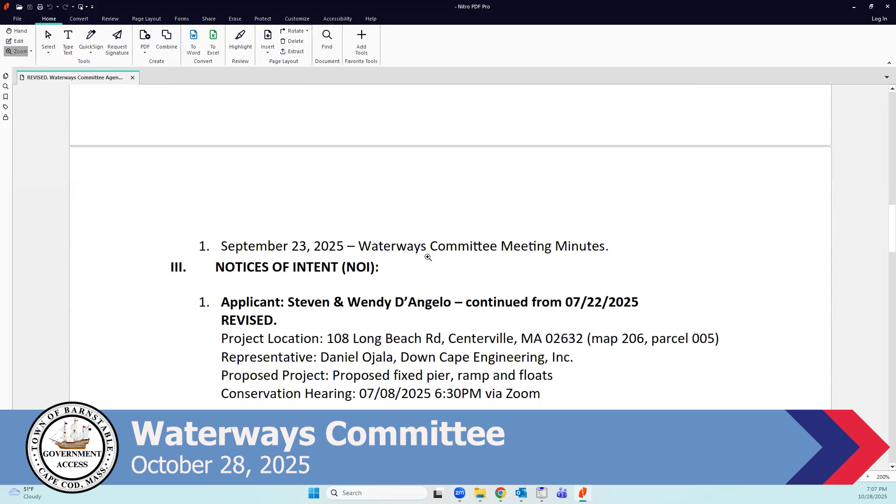Waterways Committee meeting minutes - do we have those minutes for September 23rd? Good evening, Brian Taylor, Harbor Master. Yes, Polly submitted them through email earlier this week. Has everybody had a chance to review those minutes? If so, I'll entertain a motion to approve as written. So moved. Second? Second. All in favor? Aye. Thank you.

Next up we have Notices of Intent. Steven, Wendy D'Angelo - this is continued from 7/22, revised. The project location is 108 Long Beach Road in Centerville, represented by Dan Ojala of Down Cape Engineering. The project is for a proposed fixed pier, ramp, and floats.

The conservation hearing was on 7/8. Do we have Mr. Ojala? Yes. Good evening, Chair Everson, members of the committee. For the record, my name is Dan Ojala. I'm a licensed civil engineer and also a professional land surveyor, and I work with Down Cape Engineering in Yarmouth Port.

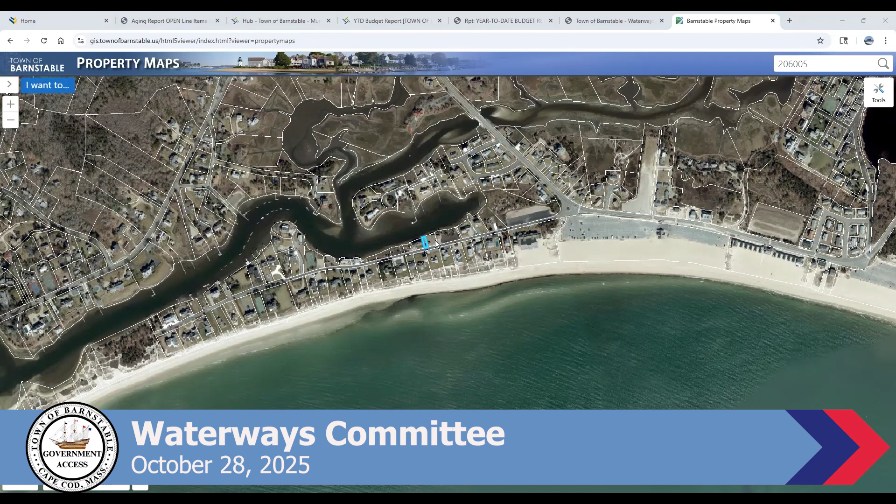As you may recall, this is on the little cove off of Centerville River, so it's kind of a backwater - it's the end of the Centerville River, unless you're going to go north and up under the bridge. Some kayakers may go up that way. It was dredged a while back.

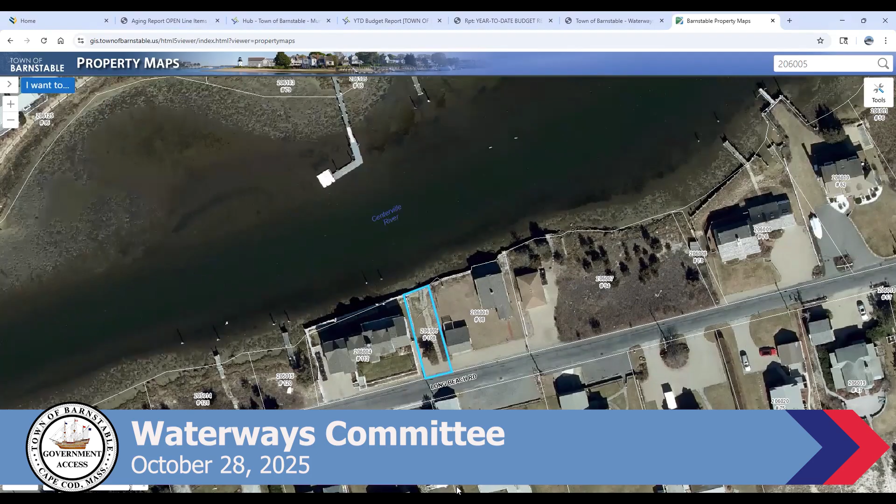There's actually a fair amount of water in the middle, and there's a couple of moorings out there. This is a wintertime aerial that you're looking at, so a lot of the piers are not deployed, and it looks like some of the newer ones haven't been put in the ground yet. Nonetheless, it's an area that's not heavily traveled, except there's eight or ten boats moored to the east of us.

This is one of the lots. There are many of them created where you have lots on the north side, and those either were dock lots that have houses on them, or they created dock lots when they conveyed them out.

So the larger homes on the south side of Long Beach Road are on the open sound, and of course that isn't appropriate for a pier because you get rollers coming in off Nantucket Sound and it will wreck your pier and boat in short order, let alone hurricanes. But on the north side, it's a good place to put piers, and you can see the areas sort of bristling with piers.

We do have a licensed pier right now. It's a float fixed to a licensed bulkhead. To our west, there's a slightly older bulkhead with two docks on it. To our east, there's a bulkhead with a dock on it.

On the opposite of those described properties, there's a fixed pier, ramp, and floats on either side of that. And across the river you can see some rather monumentally large piers that come out into the deeper water to give those boat owners access to navigable water.

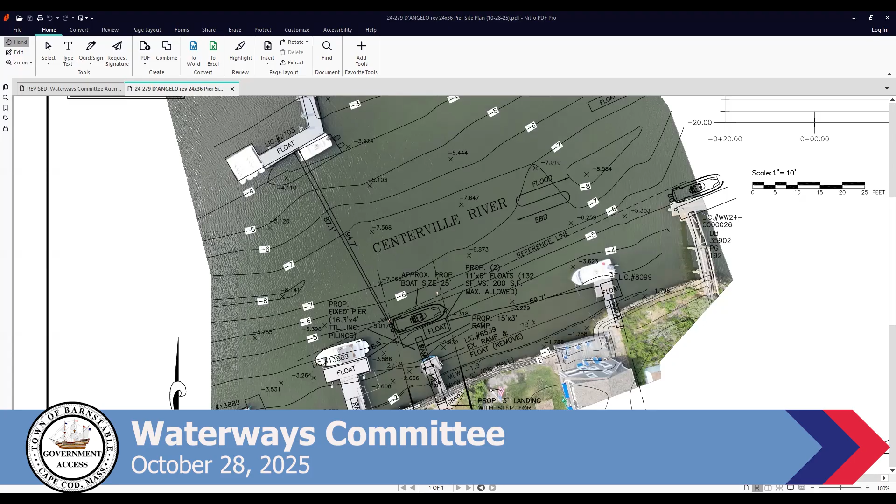Thank you. Are you able to enlarge that screen you have there, sir? I think Polly's got it up, so you can go in quite close, I believe.

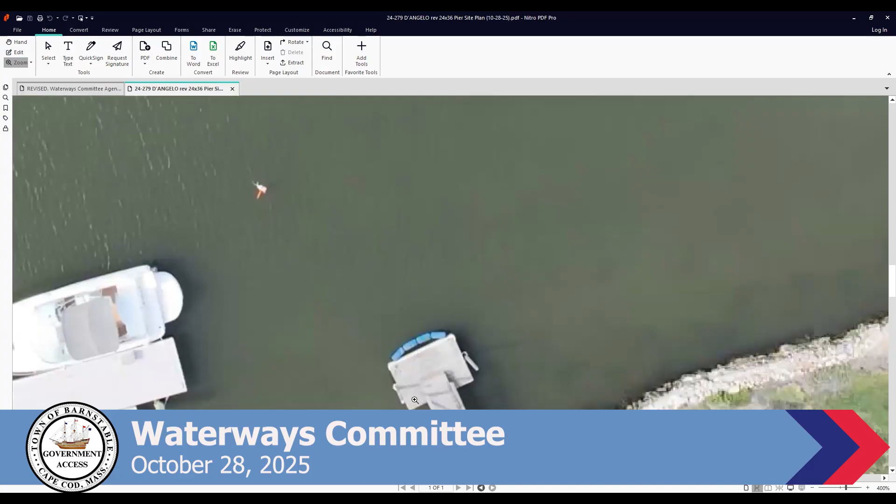So what you see there is the existing ramp and float, and then the proposed one. The two little white dots are floats that we put out at the site, where the original proposal was about 10 feet prior to where we ended up. So we pulled back — the boat will be inside of those two buoys in the final permit if it goes through.

Chairman Everson, Brian Taylor, Harbor Master. You do have correspondence in relation to this agenda item as well. I'm not sure if you want to hear it at the same time, but you do have correspondence from Pierce Atwood LLP regarding this.

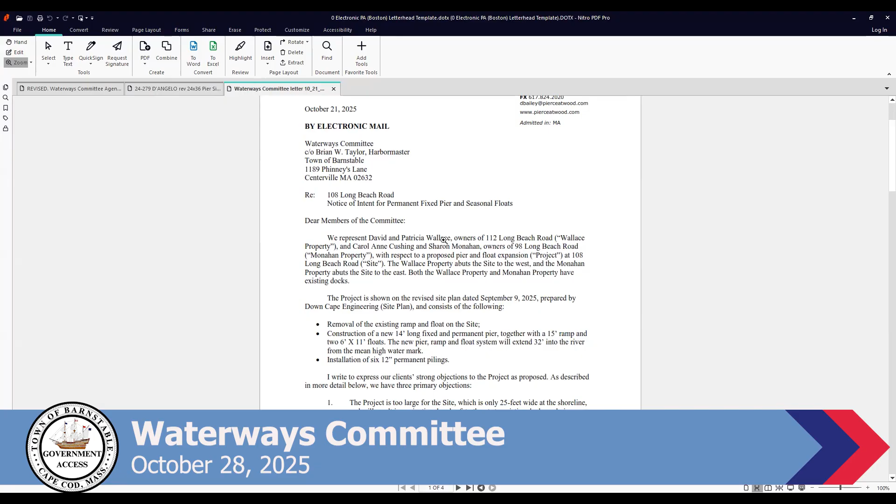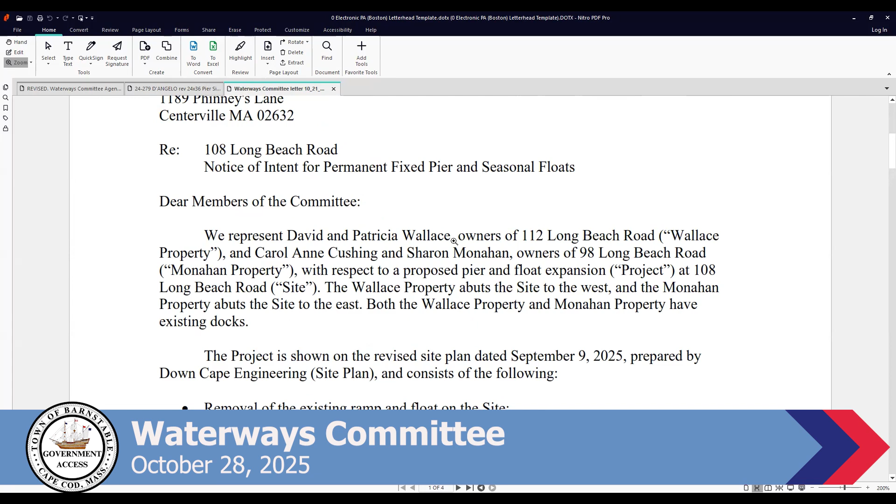Understood. So why don't you go ahead, Mr. Bailey, and go ahead with your comments.

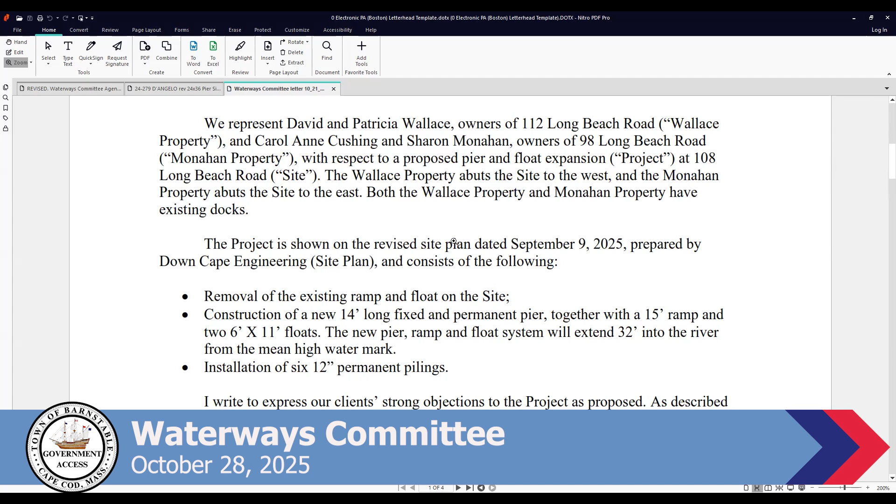Sure, thank you, Mr. Chair. For the record, my name is Dan Bailey. I'm a land use and environmental attorney at Pierce Atwood in Boston. I represent the abutters on either side: David and Patricia Wallace at 112 Long Beach Road, and Carol Anne Cushing and Sharon Monahan at 98 Long Beach Road. My clients have three objections to this proposal. The first is it's simply too large for what is a very narrow 25-foot wide site at the shoreline.

We've seen it on the plans, and we can put them back up, but the distance from the new proposed dock to the Wallace's existing dock on the abutting property is only 16.5 feet. We think this will result in navigational and safety threats to existing docks and piers on my client's property, particularly the Wallace property to the west.

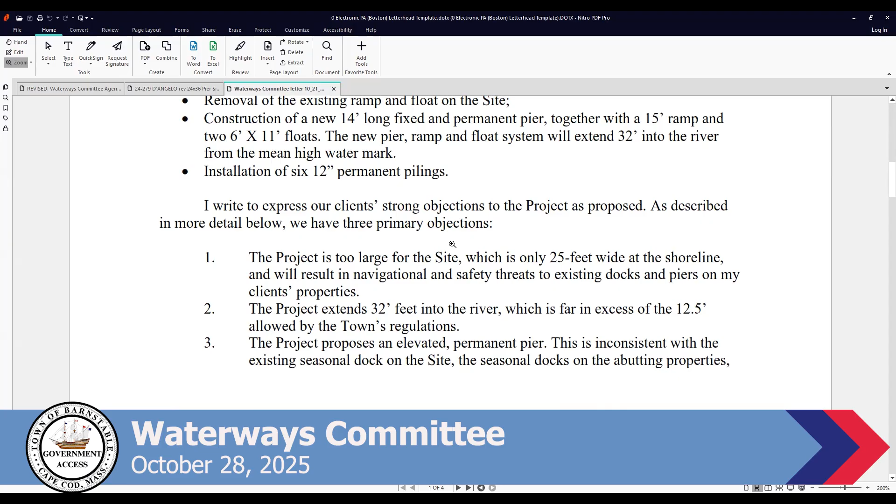The next comment we have is, as Mr. Ojala mentioned, the proposed new dock and float extends 32 feet into the river. Your regulations provide that docks and piers should not extend more than 50% of the frontage of the shoreline into any river or navigable waterway. So this is 2.5 to almost 3 times extending beyond your regulations. Obviously, the reason you have those regulations is if you have a whole bunch of narrow waterfront shorelines, it gets very crowded very quickly.

This one works right now, but if it were to be further extended, then it would get extremely tight.

My third point is that what is being proposed is an elevated permanent pier. Your regulations provide a strong preference for seasonal docks, much like we have seasonal docks on the abutting properties, because the impacts of seasonal docks are lesser than the impacts of permanent piers. Here, we'd have a permanent pier that would require 6 pilings, and the attendant disturbance from that.

So there are a couple of regulatory reasons here that are entirely inconsistent with your rules, that you would need to, I guess, grant a waiver for. I haven't heard any really good reason for a waiver other than that, well, we need the depth. Well, yeah, okay, you need the depth, but you could also go with a smaller boat. Those are our concerns.

I go more into a regulatory legal analysis later in the letter, but those are the highlights, and I won't bore you with the wonky stuff. And I'm very happy to answer any questions.

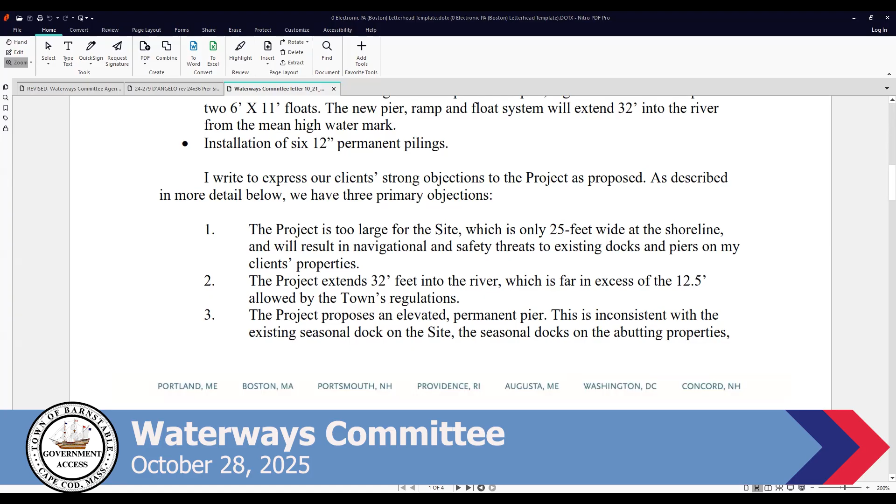Okay, sir. Thank you. Yeah, I found the letter here now, it was on the other side. Do we have comments from the Harbor Master's Department on this application as presented now?

Good evening, Brian Taylor, Harbor Master. So I do believe that the proposed project, although revised, and I like the plans a lot better than what was originally proposed, it does encroach on the two properties to the left and the right.

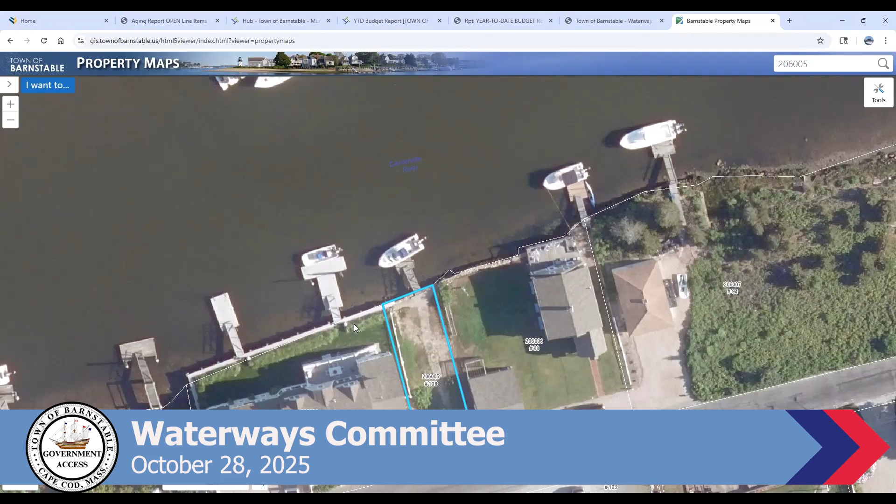If you take a look at the image that I have up, can everybody see the image of the property map? Yes. So I believe it would limit some access to the property to the left, 112 Long Beach, for some navigational concerns. Again, just because this existing Centerville River location -- I'm going to back out here -- is down Centerville River, there is a small parcel that's a town way to water.

And again, most of the dredging that occurs in this location occurs up until McCarthy's Landing, or also known as Hayward Landing off of Hayward Road here. And there's existing mooring permits in here, there are a few mooring permits down actually in this little cove.

Now, like I said, there is a town way to water here for public access, and Mr. Ojala had mentioned that most of the navigation in here is kayaks. And so there are some larger vessels that are permanently affixed to docks here, and they're also on fixed piers as well.

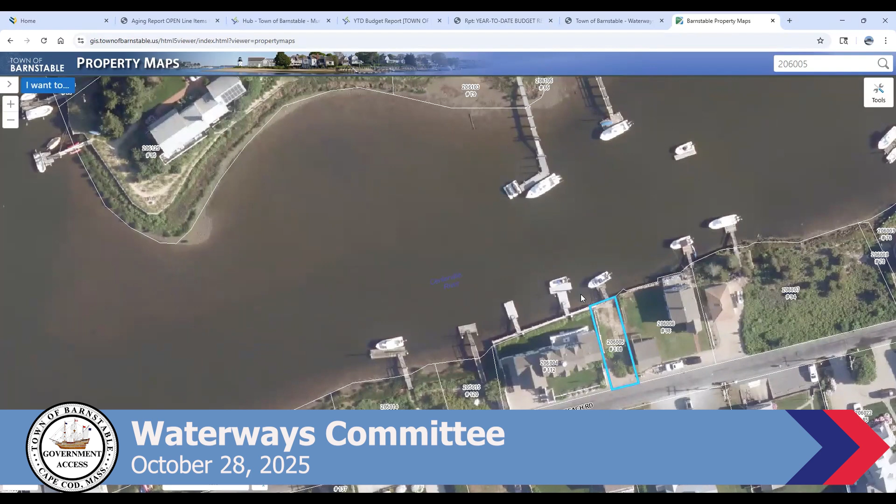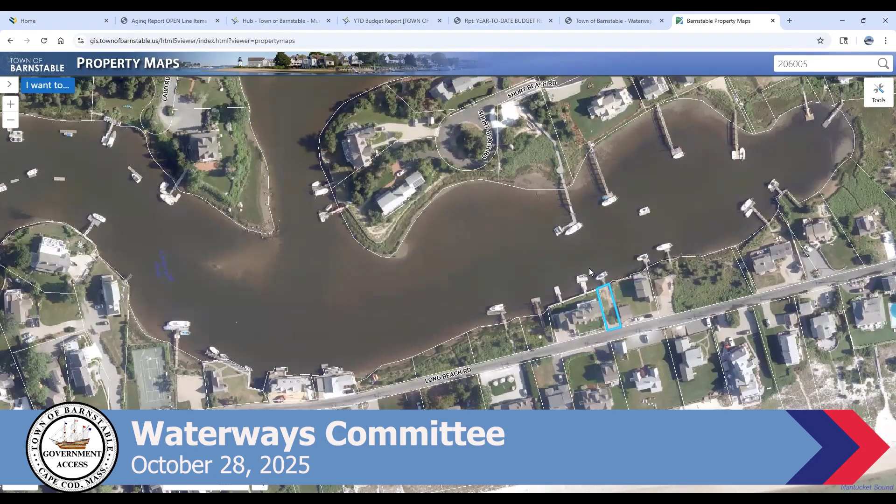Again, I do think that it is in close proximity to the existing pier that's on 112 Long Beach, and I'm a little bit hesitant with extending any piers as far as we go here. I know we've run into some of these issues down the road here with Fish Hills, and even in some parcels within Centerville River, where navigation occurs right along the dock's edge. And that invites other issues, as I deal with on a regular basis, like no wake issues, speeding issues, and increased complaints because docks are in close proximity to channels.

I will say that this is quite outside the Centerville River kind of navigable water, say, at this point -- not to say the town couldn't dredge in this area in the future to the town landing here. But those are pretty much my comments at this time.

Okay, thank you. Comments from other committee members?

My primary concern is that if we deviate from our specifications, it potentially opens up a can of worms, and it lends us to a level of congestion that wouldn't be very favorable for anybody. So that's my primary concern. I love to see people get access to the water, but we do have some guidelines in place that at the very least beg a conversation, if not just sticking to them for their merit.

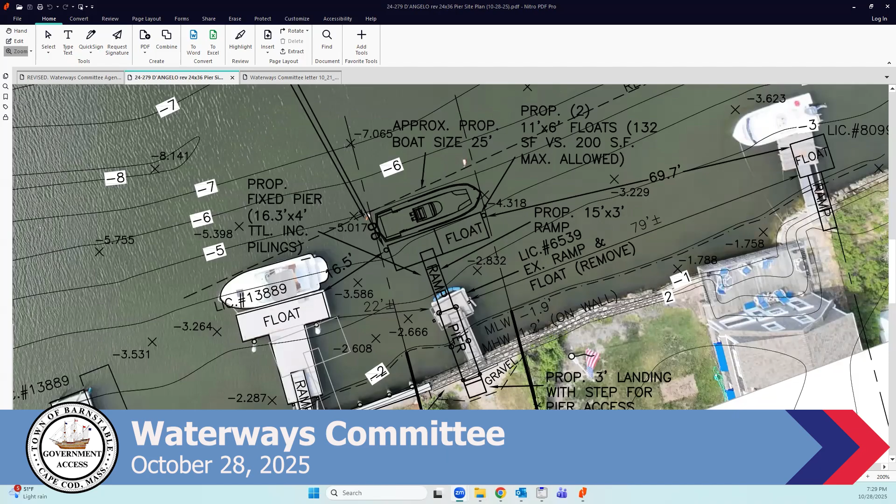If I could, through the chair. Yes, go ahead, Dan. So Dan Ojala from Down Cape. I just want to point out that, as you could see from some of the photos, there already is a pier there. Basically his ramp and his float and boat are proud of us right now. So to say that he's giving us navigational issues, and then if we go out just a little bit beyond him, then we're giving him navigational issues -- it's just snug in there either way.

If there wasn't a pier here, I certainly wouldn't ask for it. But for us to go in there with a good sized boat, stirring up the bottom and navigating back and forth, it would seem to make more sense to push us out into a little bit deeper water, have a little bit cleaner flow through there, and put it where we've got it. Right now, there are no limitations to the size.

You say we could use a smaller boat, but there's not much that drafts under 18 inches. Anytime you have a boat, it's going to take at least 6 inches, even with a very flat bottom and the motor down, about a foot underneath that just to catch clean water. So we're about as shallow as we can be and meet that regulation, which the commission likes to hold us to. It's not high shellfish habitat, but 12 inches is not a lot when you get the muck. And if you look at the big picture, there's a ton of room to get through there.

We had talked before about a reference line. We drew a blue line, and you said maybe if we get it behind that, that would be reasonable. We've pulled it in, so we do meet that. We've got about the shallowest draft boat you can float, and it's kind of where it needs to be. So I'd really appreciate some direction on if we could put it just a few feet in from there.

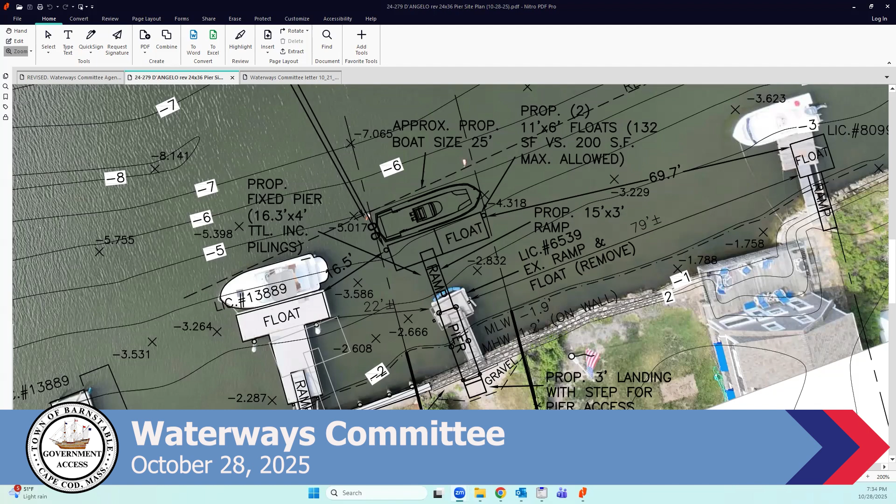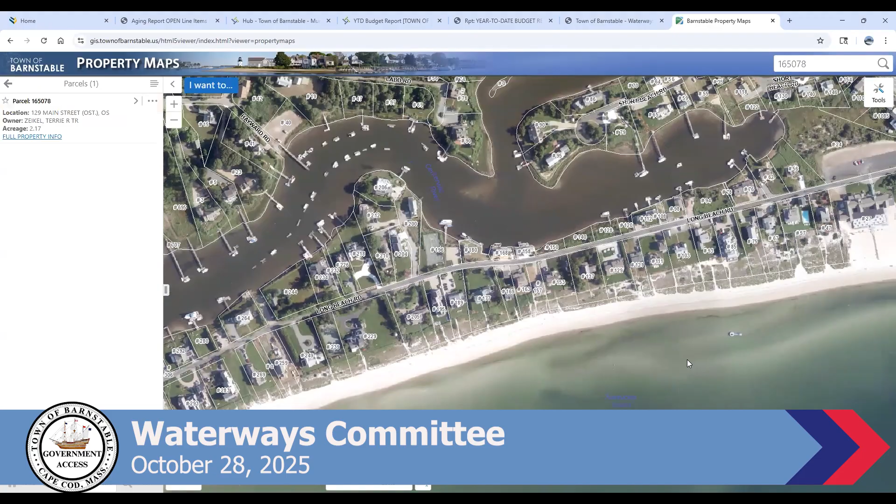Do I have a second on that? Second. Okay, we'll do a roll call vote. Jacob, aye. Todd, aye. Greg, in favor, aye. Gary, in favor. And myself, in favor as well. So it is not approved.

Well, we appreciate your consideration on it, and appreciate the tricky job you guys do for the town, and we'll see if we can revisit it in the future. Thank you, sir.

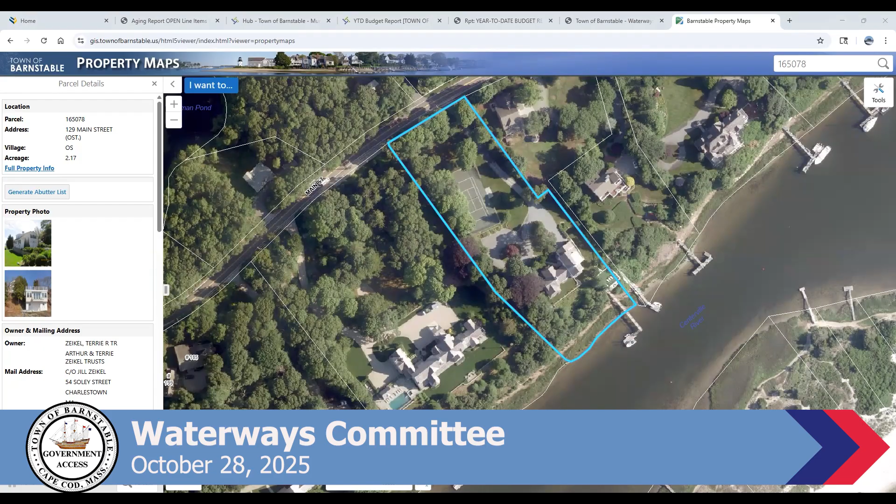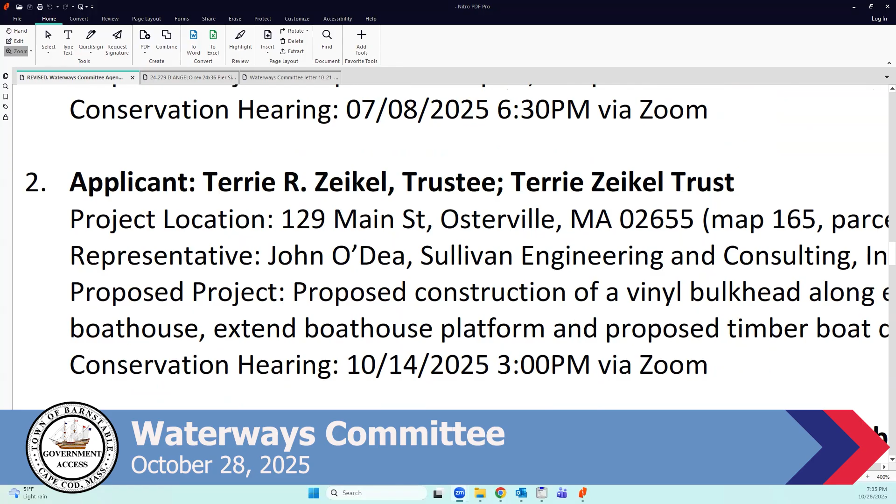The next applicant is Terrie Zeikel, trustee for Terrie Zeikel Trust. Project is 129 Main Street in Osterville. The proposed project is construction of a vinyl bulkhead along the existing boathouse and extend the boathouse platform, and a proposed timber boat dolly.

Okay, I've got that back up here now too. A dolly ramp. Do we have Mr. O'Dea from Sullivan Engineering? Yes, John O'Dea, Sullivan Engineering, representing the applicants.

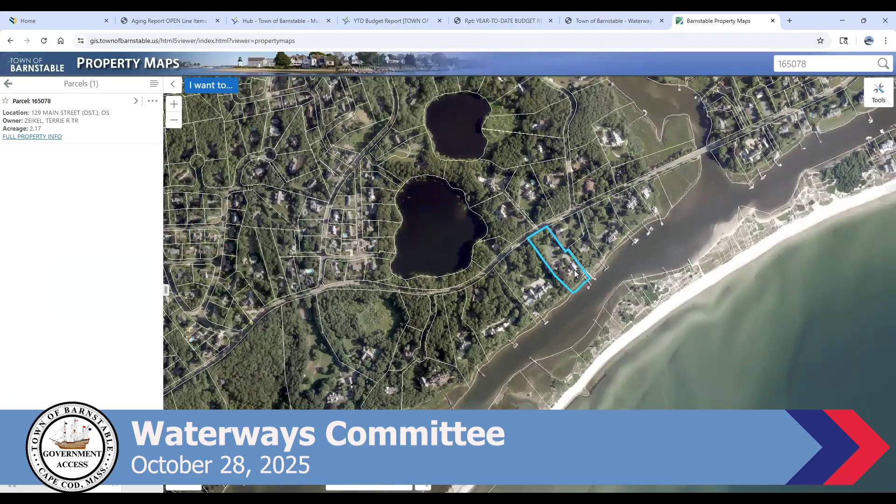This is 129 Main Street in Osterville. The aerial's up here. There is an existing boathouse, and we are proposing to construct a bulkhead just along, just seaward of that, not across the whole property, about 8 feet off the deck of that. We're well above mean high water. We had proposed a little bit of a dolly ramp to get over the top of it, which also wasn't going below mean high water, and some additional platform up by the boathouse. Conservation was struggling with those, so they've been removed from the plan at this point, but we are still moving forward to try to get their approval just for this stretch of bulkhead. As I said, it's above mean high water. I don't see how it would have any navigational concerns, but here we are.

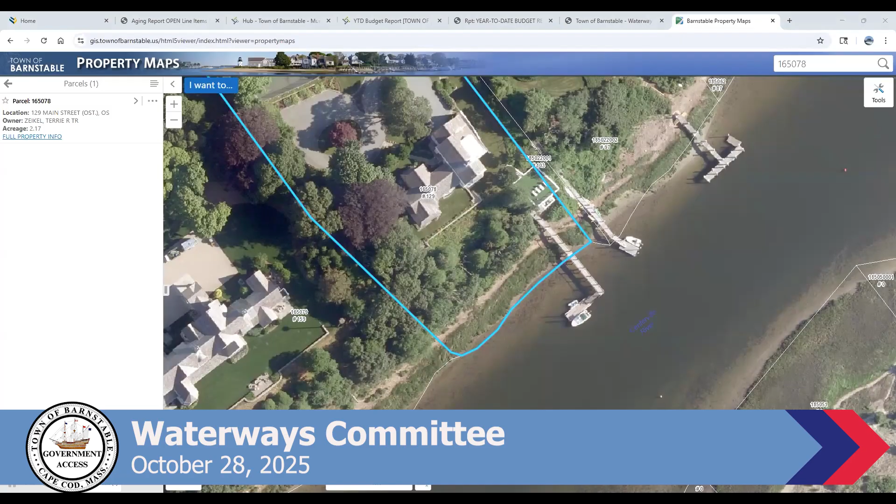Okay, and can we enlarge that as well? So, the bulkhead, would that be located where that blue line is, the one closest to the water? No, see that deck that the cursor was just at? Yeah, it's about eight feet seaward of that. So maybe if you walked along the dock one more pile down, that's where it would be. Okay, right there, above the marsh, above mean high water.

And the dock situation is remaining the same? Nothing, doing nothing. Okay. Harbor Master Department, do we have a comment on that? No comments at this time on this project. Thank you. Okay.

Do other committee members have anybody like to speak to this? I guess more so out of curiosity, what's the intended purpose of the bulkhead? Is it to keep water out? Is it privacy? It's to keep the water from eating away at the land that's in front of the boathouse. There's a decent 3-4 foot scarp just off that face at this point, and they don't feel comfortable letting that get any closer to the building. It would turn into a real problem. So we're just trying to build a little wall, keep storms like today off of it. The big one's gonna go right over the top and knock everything down.

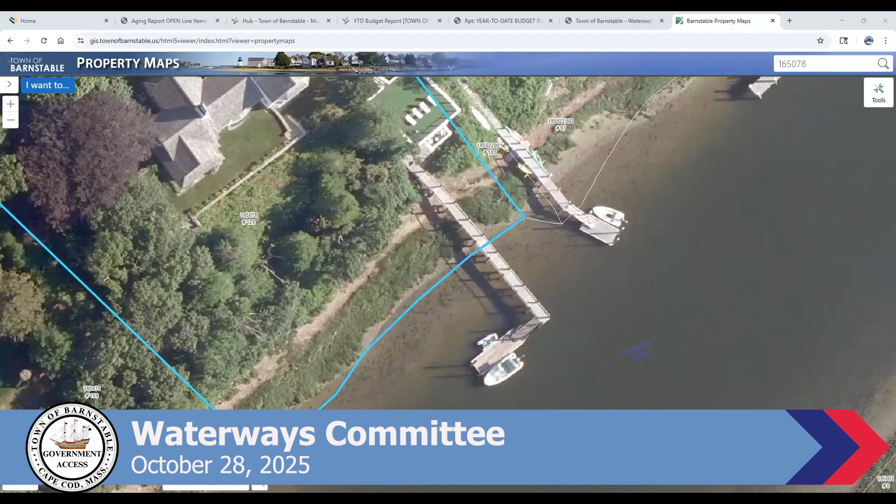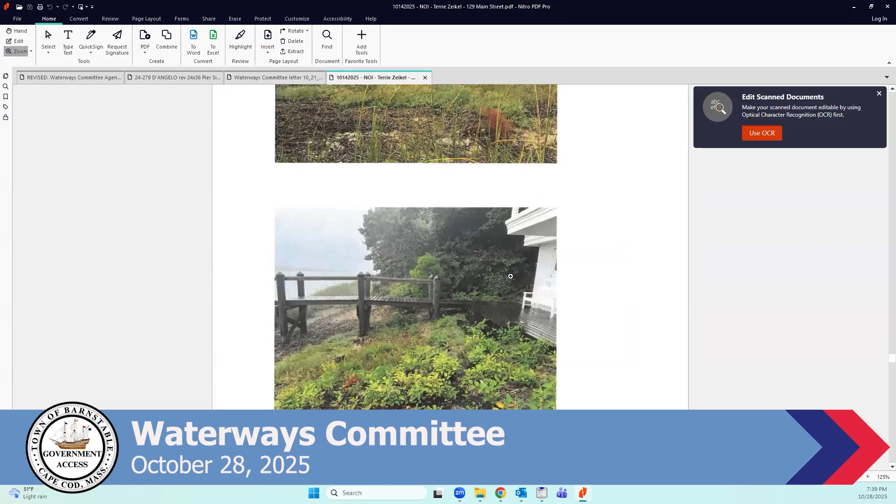And the proposed height of the bulkhead, both subterranean and above ground? So the top of the bulkhead is set at elevation 5.75, and the grade running above the marsh below this wall is 3.5. The lower level of that boathouse is about 8. So we're kind of sitting right at that midpoint in between those two. Okay, great, appreciate the clarity. No problem.

Okay, anybody else have comments on this? I'll entertain a motion. So moved.

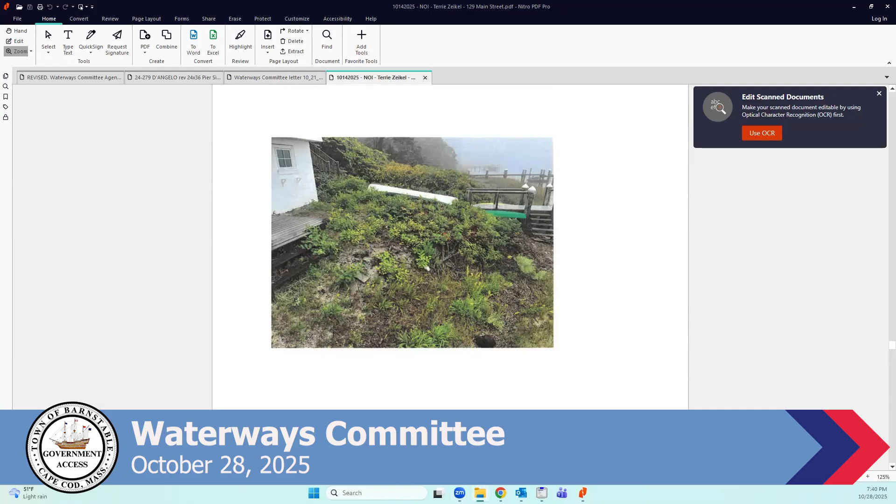That's a second, motion approved as proposed, right? Correct. Okay, and who did I get the second from? I'm sorry, Todd. Thank you. So Todd in favor, Greg in favor, Jacob aye, Gary aye, and myself in the affirmative.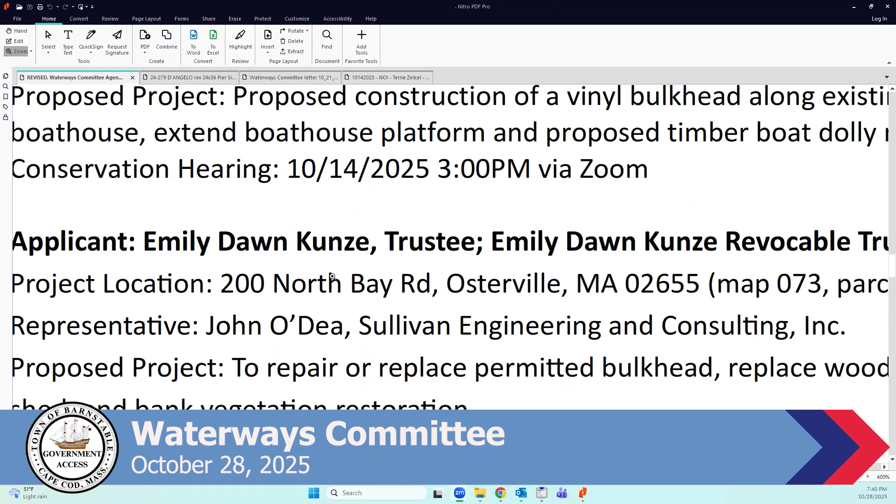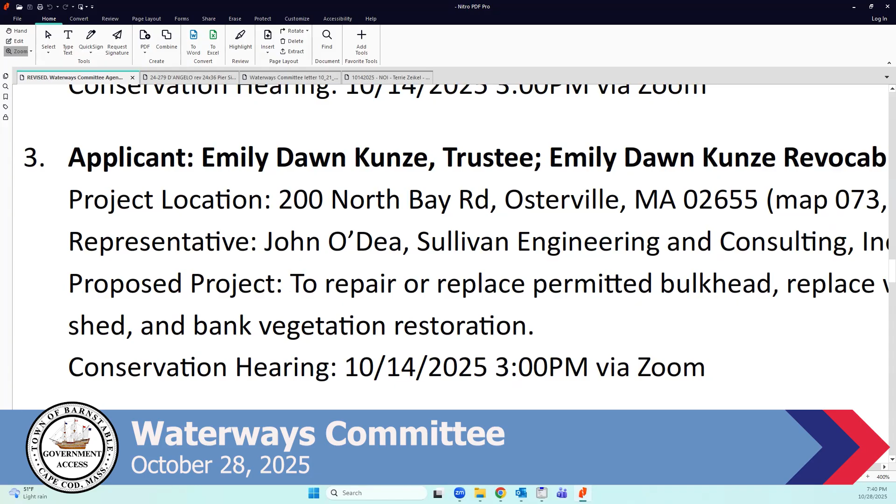Okay, thank you. Next up we have 200 North Bay Road in Osterville. This is Emily Dawn Kunze, trustee for the Emily Dawn Kunze Revocable Trust. Again, Mr. O'Dea will be representing this one. Repair or replace permitted bulkhead, replace wood landing and a shed, and bank vegetation restoration.

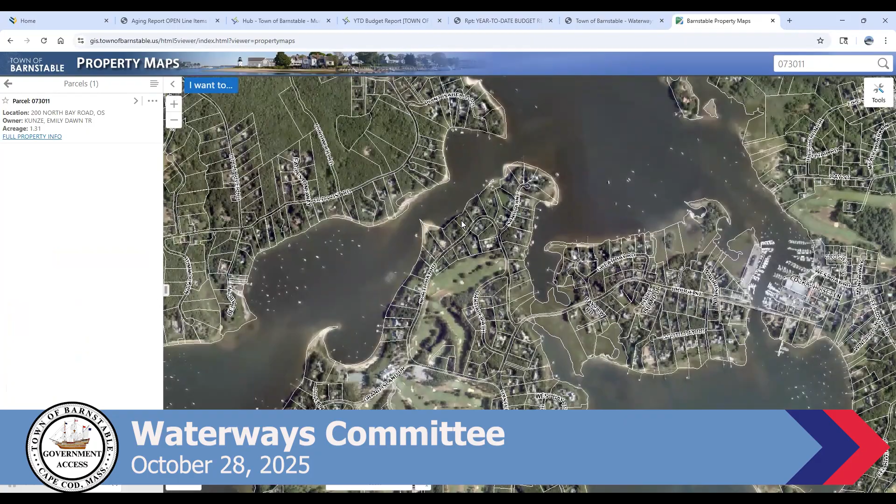Mr. O'Dea: So this property is 200 North Bay. I'm not sure if they'll bring up the aerial, but the shore front is currently protected by a timber bulkhead. Our project, it's showing age, getting some washout behind it, the wood is not getting any younger, and it's an appropriate time, we believe, to be upgrading it.

We're proposing to build a new vinyl wall immediately along the seaward face of the existing structure. We're not making changes to the pier, nor to the size or location of the existing landing, which is that bump out in the blue line centered around the pier. The other work is all landward of it, doing some bank vegetation restoration to improve stability and habitat. There's an existing shed above the bulkhead which will be relocated, but not going out into the ocean.

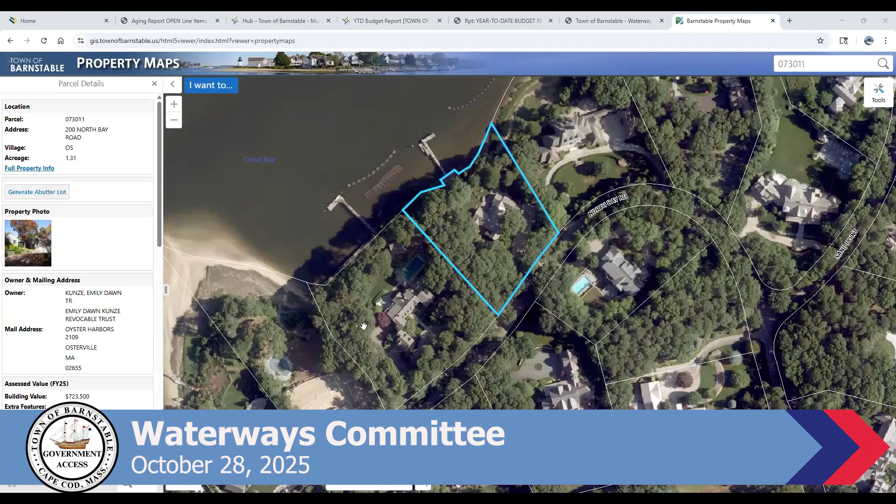Okay, thank you. And you said that this new bulkhead will be immediately in front of the old one? That's correct. Okay, questions from any of our committee members? No changes, just basically mimicking the existing structure with different material and laying it in front, about 1 foot higher, but no changes in direction or location, just material.

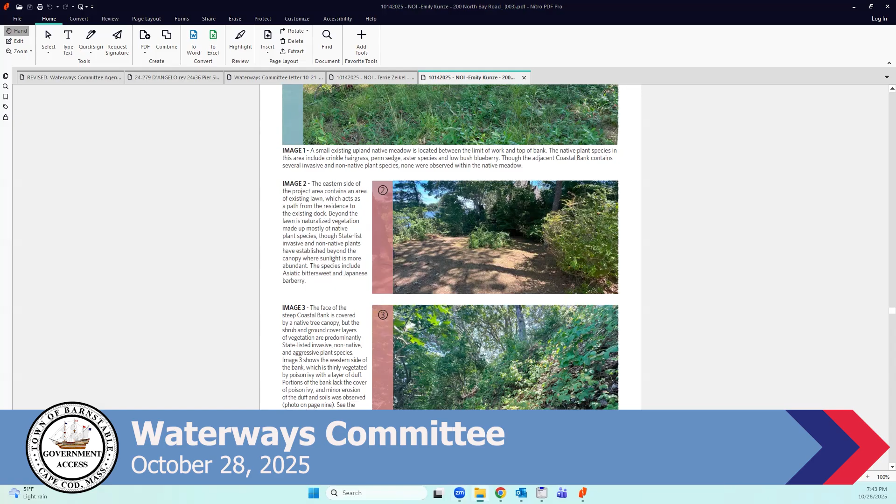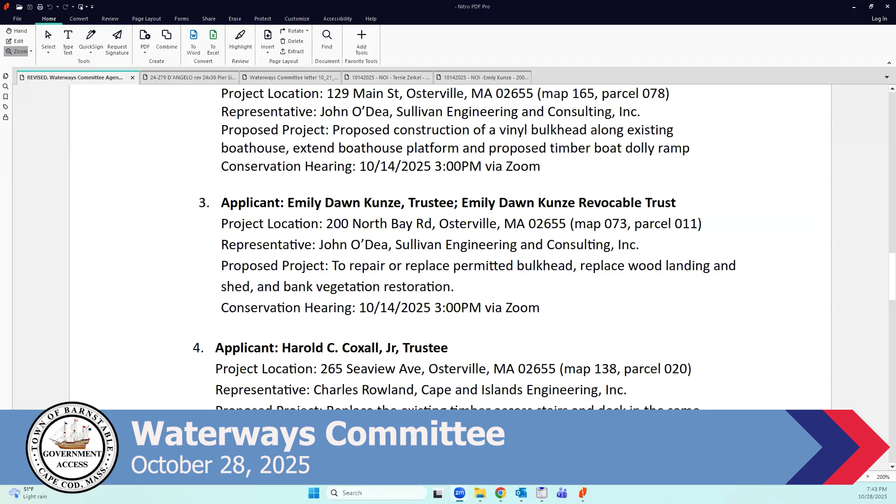Okay, thank you. If anybody else, if not, I will entertain a motion to approve this one. I would make said motion to approve this as designed. Okay, thanks Todd. Second? Second. Okay, thanks everybody.

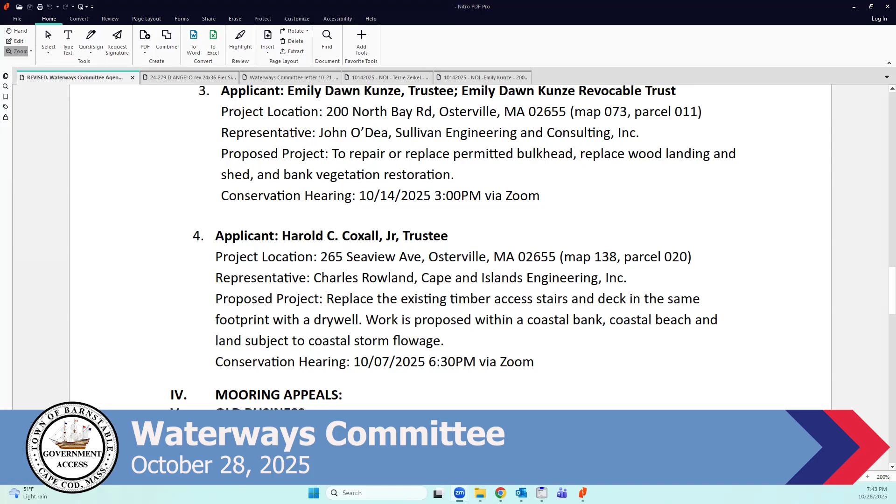So Todd and Gary, Jacob, aye. Greg, yes, aye. And myself in the affirmative as well. That's all, that one passes. Thank you everyone, have a nice night.

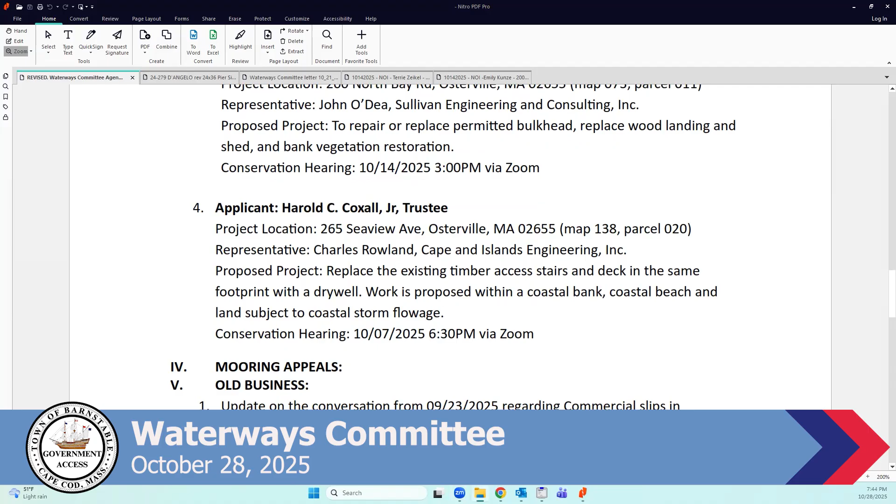Thank you. Next up we have Harold Coxall Jr., trustee. Project location is 265 Seaview Ave in Osterville. Represented by Charles Rowland of Cape and Islands Engineering. Proposed existing timber access stairs and deck in the same footprint, with a dry well. Work is proposed within a coastal bank, coastal beach, and lands subject to coastal storm flowage.

Do we have Mr. Rowland? He is not on, but I am. This is Kasha with Cape and Islands Engineering, representing for him. Okay, please go ahead. This is Kasha Koss, a wetland scientist and permitting specialist with Cape and Islands Engineering, representing Harold Coxall at 265 Seaview Ave for the proposed in-kind replacement of the deck and stairs.

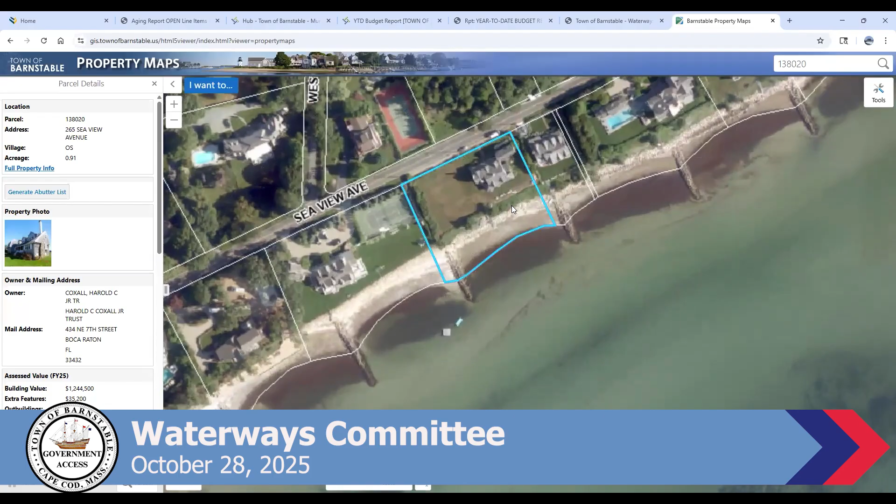It is above the mean high water line and completely within the coastal bank and flood zone. It was already approved by conservation, and no comment was necessary from DMF as it is completely above mean high water and essentially completely over an existing stone riprap and a portion of maintained lawn. So if there were any concerns or questions, I'd be happy to take them.

Where is the location of the dry well? The dry well is even further inland, landward, near where the coastal bank flood zone line is. If you can see the plan, it should be landward of the stairs. And that would be an improvement to current conditions, as there is not currently a dry well.

Okay, what is a dry well, if you don't mind me asking? That I am not sure exactly. It's for drawdown for the hot tub that's there. What do you mean, like what's drawdown? Are you asking the type of dry well? Yeah, like what is a dry well, I've just never seen one before. Oh, it's to address runoff from a surface area, typically for roof runoff and water. So here it's just addressing if the hot tub needs to be drained, it would go into the dry well versus onto the lawn or down into the ocean. I got you.

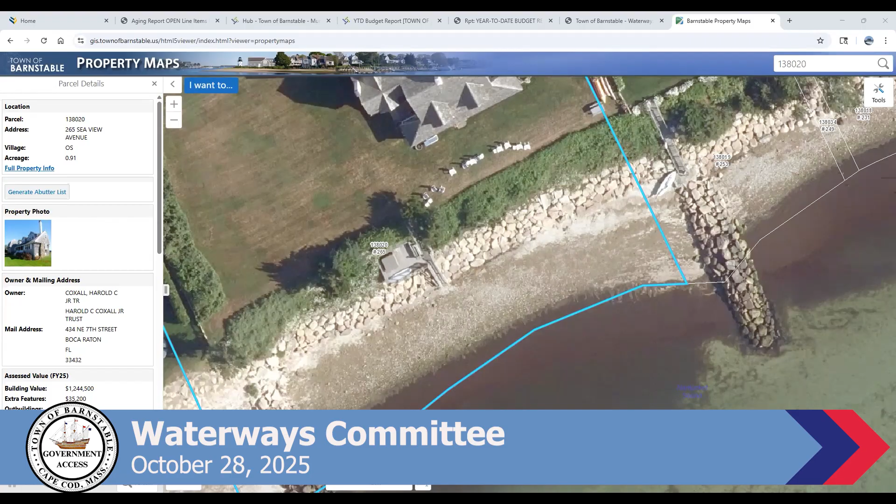I'll make the motion to accept it as designed. Second. Thanks, Greg. Gary, aye. Jacob, aye. And myself, aye. Okay, that's all set.

Mooring appeals, we have none. Old business: update on the conversation from September 23rd regarding commercial slips in Barnstable Harbor.

Harbor Master Taylor: Good evening, Brian Taylor, Harbor Master. I've been doing a bit of research over the last month. I believe we were originally advised about Rock Harbor and some of the regulations they had there pertaining to commercial slips, they call it the South Dock commercial slip. I've read up on some of that information, as well as did some research on the state aspect with the legal law library in regards to wait lists. I haven't got a definite answer, and I need to circle around with the town's legal to certify this.

But it looks like, as far as marina space goes, it's kind of hard property, and we can manage the wait list as we see fit. It's a little bit different than Mass General Law Chapter 91, Section 10A, which requires towns to have a wait list for some of the mooring fields.

So there's some research I've been doing, as well as I contacted another state agency. It's actually an association, but they got their information from a state board in regards to charter and head boats, called the Stellwagen Charter and Head Boat Association. I contacted the vice president in regards to whether or not he knew of any other municipalities, and if they had any special commercial or charter head regulations.

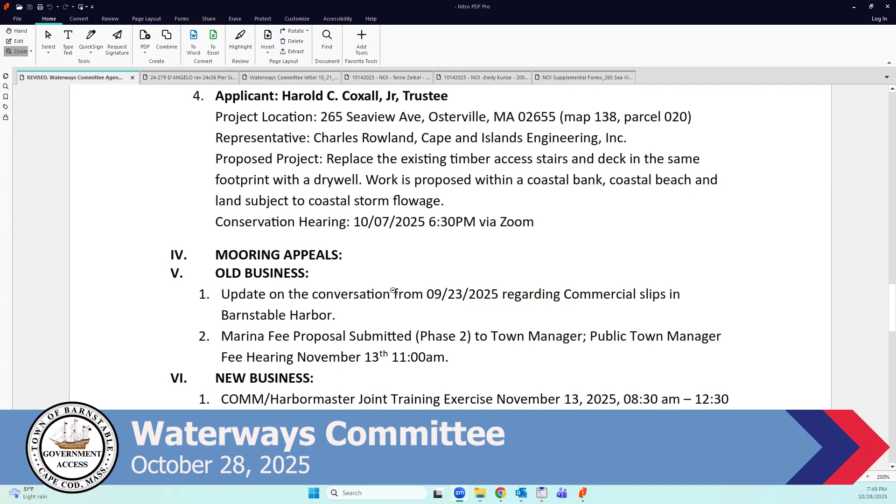Okay, thank you. You want to continue with the marina fee proposal? Yep, so I submitted the proposed marina fee phase 2 structure of the fees to the town manager. The town manager will hold a public fee hearing on November 13th at 11 a.m.

Could you throw them up by any chance? Sure, I think I can do that. I know you showed them, like, I think at the last meeting or before that, but... Yeah, give me a second here.

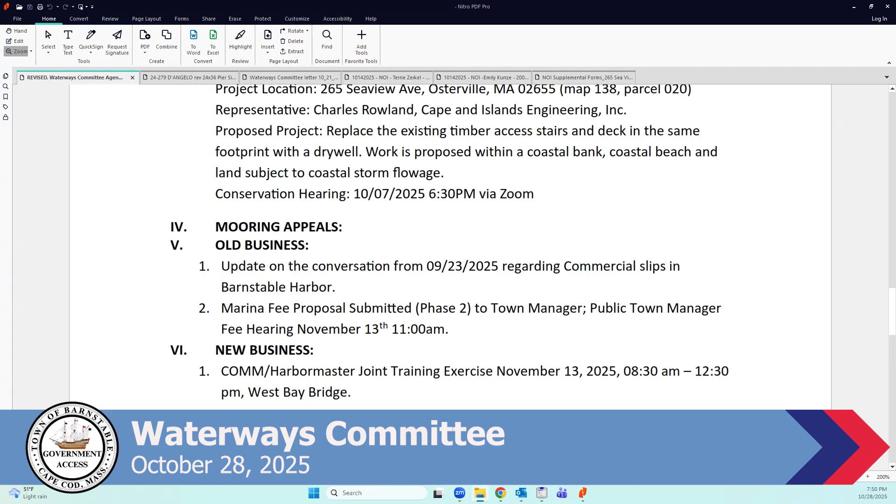Were there any changes to the off season this time around, or just the stuff in the red? Just the stuff in the red, which is going up $5 a foot for residents and $5 a foot for non-residents. And then there was a 25-cent increase per day for recreational transient dockage in season. Gotcha, thank you. And that's in line with other municipalities around here. Thanks.

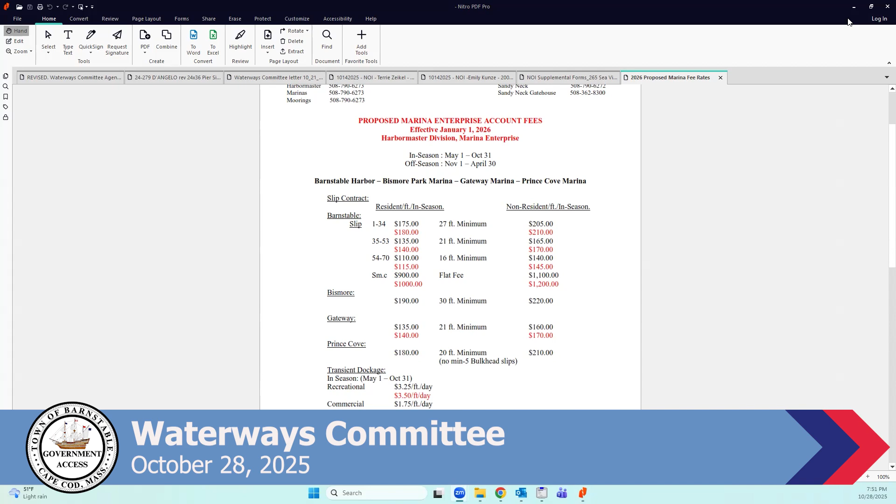All right, thank you. And under new business, can you tell us about your upcoming joint training exercise? Yeah, let me just stop sharing my screen here. Did I stop sharing?

So we have a training exercise on November 13th, in the morning. We will be shutting down access under the bridge for a training exercise for diving with COMM Fire. We're actually going to be anchoring the vessel at 2 points across from both Marinas Nauticus and the other Egan property located on the other side. We'll be anchoring the vessel so there'll be a line across the entire channel, and then conducting dive training exercises for a period of about 4 hours on location.

And this will simulate someone basically submerged underwater in a recovery effort. So there will be COMM Fire Department and some other local agencies joining with dive teams, and we'll be doing some reiterations of those divers running off the back of our vessel and diving along the water's edge at the bridge to do a recovery.

The correspondence we had was with Attorney Bailey regarding 108 Long Beach Road. That was next up on the agenda, but we've already addressed that.

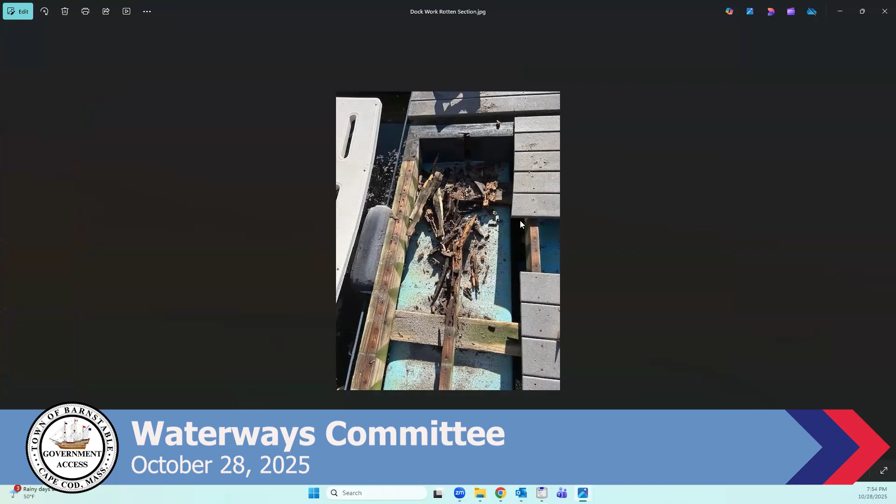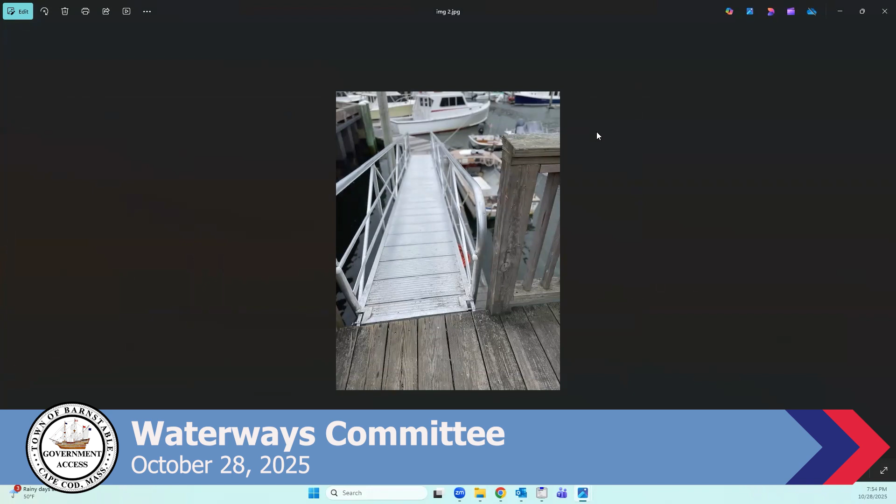As far as the dock work, I did want to show some pictures. Let's see if it will show here. Can you see it now? Yes. Okay, so the staff also replaced a gangway along our double gangway section leading into our commercial section. That was replaced with custom fabrication and installed by my staff. We did have an issue with some of the teeth that the gangway grabs into, so we replaced those as well. The gangway was upgraded this past month.

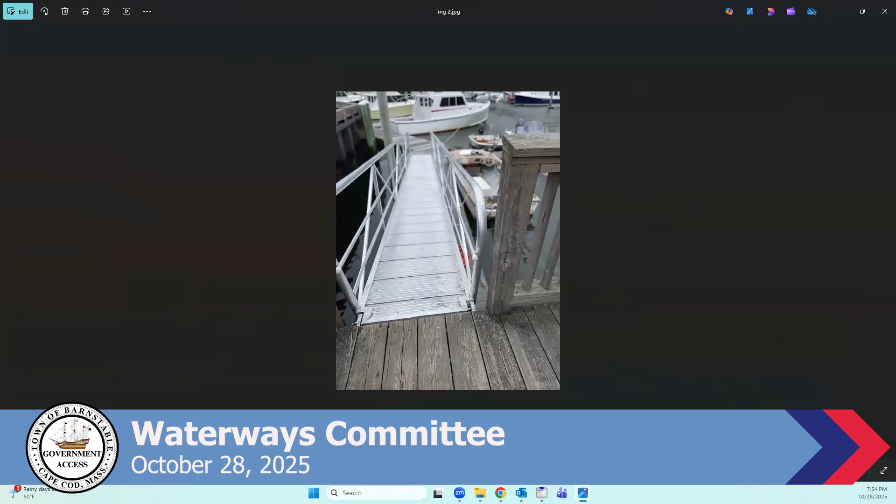And like I said, we're replacing docks. We're going to focus on replacing mains next winter. We're building fingers every single year. I just want to give a shout out to my staff, because they work long, hard hours building docks and installing them, getting everything ready to go so it's safe.

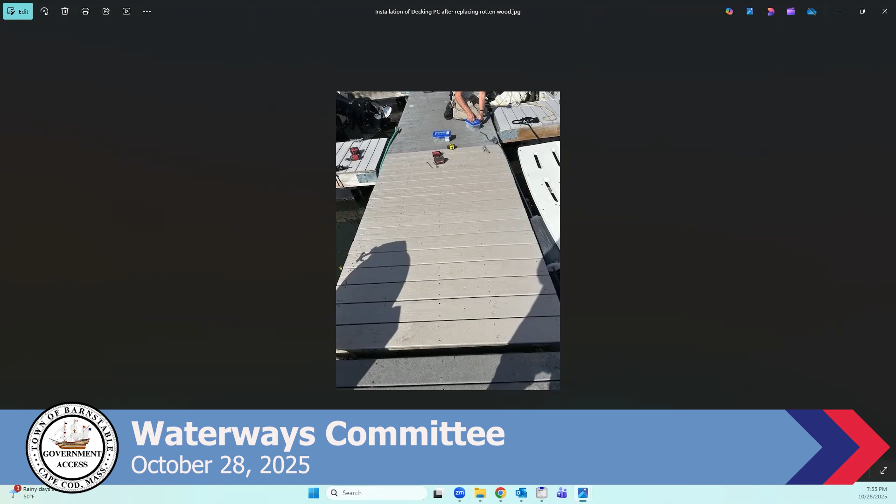Do we have anything else from any of the members to bring forward at this time? Just remember that November's meeting, we believe it's going to be on the 18th, and we can confirm that because otherwise it would be just before Thanksgiving. I think we agreed to move that one up. That's correct, it's November 18th. And at that meeting we should have our dates set forth for the 2026 calendar year, presented to the Waterways and to you, Mr. Chairman.

I'll ask though, and Jay brought this up today, Jay was interested in doing a 6 o'clock start for the winter, starting in November. So that would be a change to 6 o'clock starting this coming meeting. I'd like a motion to change that for November if everyone's okay with it, and then throughout the winter up until basically May 1st we'd have a 6 o'clock start. But it's okay if it doesn't work, he just wanted to throw it out there.

Okay, I believe we did that last year too. Yes sir. For the members, anybody having difficulty with a 6 o'clock start? Nope. Let's go through: Gary, I'm fine with it. Jacob, yeah I'm good. Greg, yes, no problems. Todd, no problems.